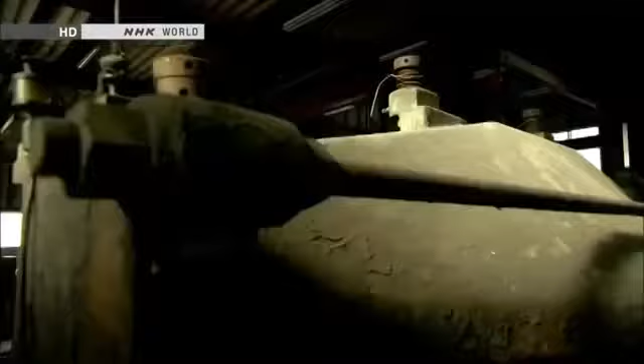The future is just around the corner. In a workshop near Mount Fuji, a curious being has appeared. It's 3.8 meters tall and weighs 4 tons. It is a giant humanoid robot named Kuratas.

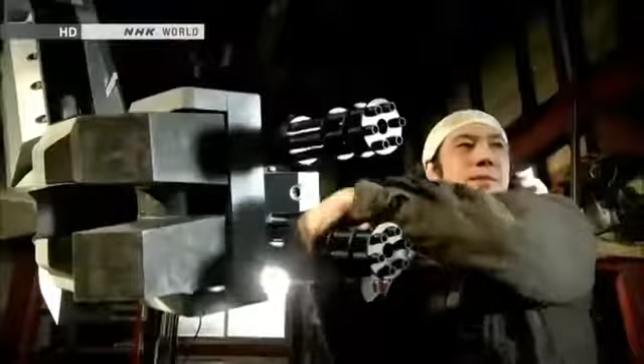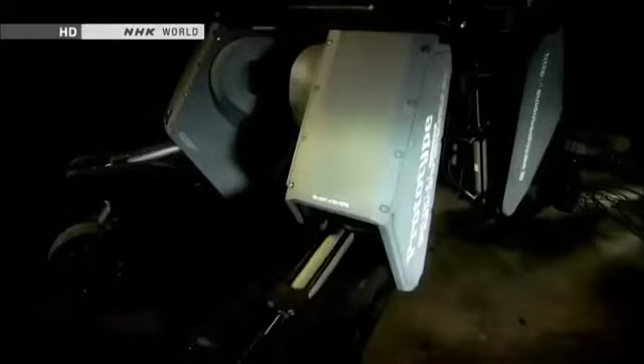Kuratas is a contemporary artist's creation. He holed up here for 2 years, building the robot with input from an expert. He calls Kuratas a work of art, but it's a sophisticated piece of machinery. A person seated inside can control the robot, move its limbs, and grab things. The artist says he was inspired by robots in science fiction tales and animation. That vision sustained him as he worked in solitude.

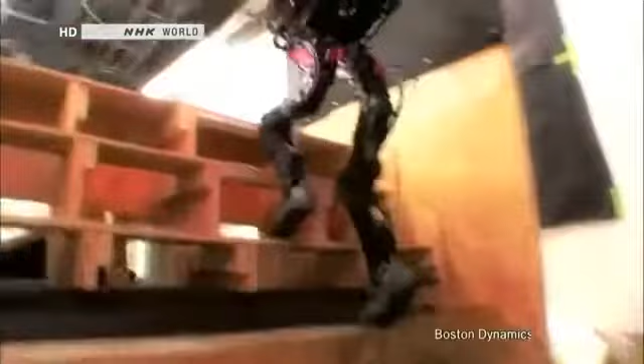Things that were once unthinkable are becoming real. How will robots evolve? Well, military applications could be one option. They'll probably become more and more like humans. They could surpass us in strength and ability. People long dreamed of creating these extreme machines. Now, humanoid robots are here. They think like we do, move like we do, and even sacrifice themselves for us.

We want our robot to change society, because robots must be useful. Electronics and computing, progress in vision systems, there's many pieces of it. We will see much more capability continue to grow. Since the Industrial Revolution, people have entrusted some jobs to machines.

But there may come a day when humanoid robots do much more complex jobs. Then, what will people do? You'll see more and more robots doing things in society, whether it's manufacturing or service applications or home healthcare applications. The key will be skillfully dividing labor between humans and humanoid robots.

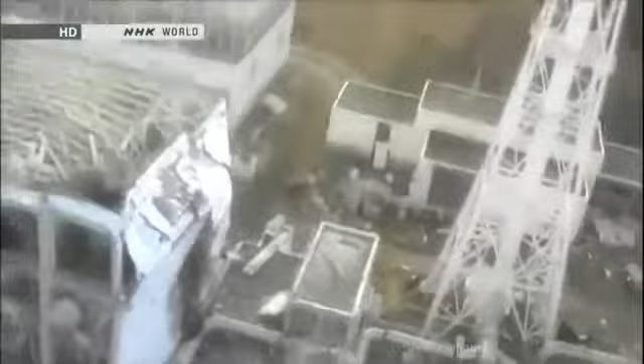The disaster that hit Japan in March 2011 accelerated efforts to develop robots with human traits. The Fukushima nuclear accident left people powerless. Robots can take over when things become dangerous. They can plow through rubble, climb ladders, even make repairs. People are turning to humanoid robots to handle all of these tasks.

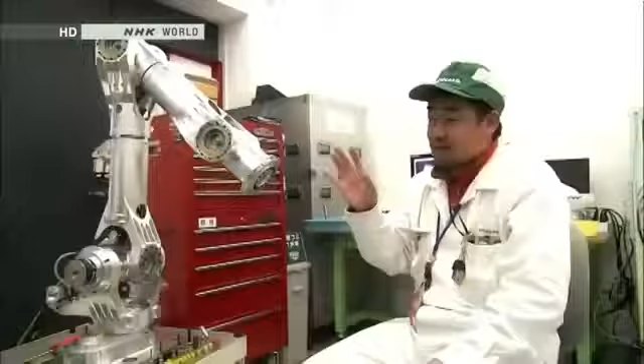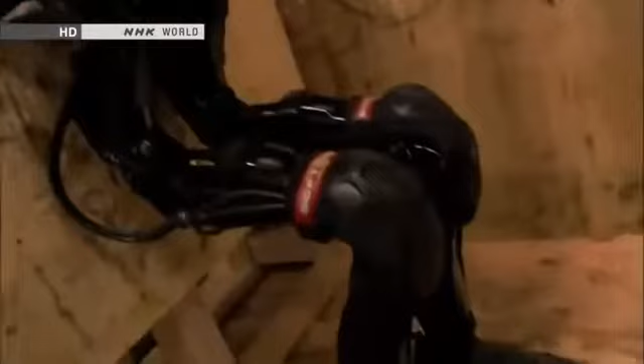This program explores the future that's fast approaching.

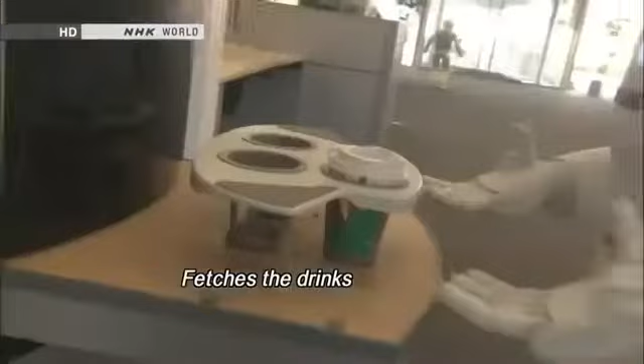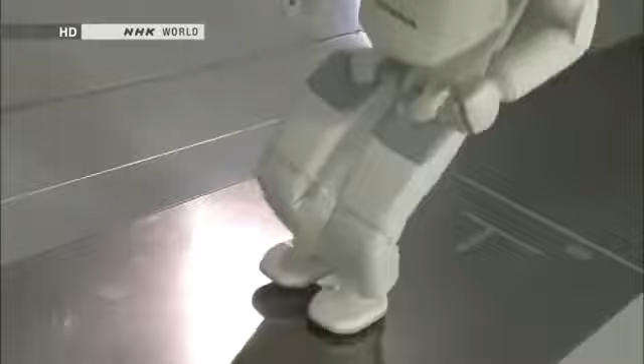Asimo was created by Honda's research and development subsidiary. We were allowed to film their top-secret robotics laboratory. Japan is a worldwide leader in the development of humanoid robots. Asimo is the country's crowning achievement. Engineers continue to make improvements.

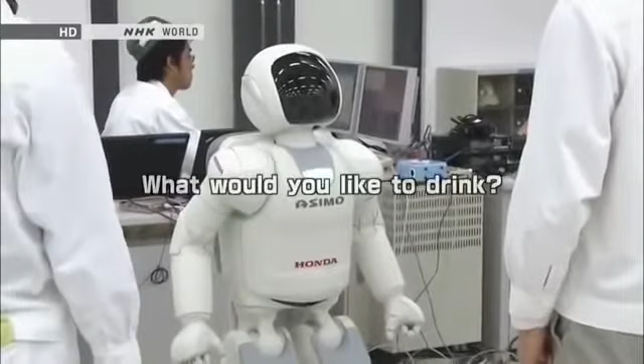Asimo's most innovative feature is its advanced intelligence. The robot can think and act on its own without human intervention. That's made possible by sensors that replicate our 5 senses. Asimo's head contains 8 microphones. It uses them to listen and engage in conversation.

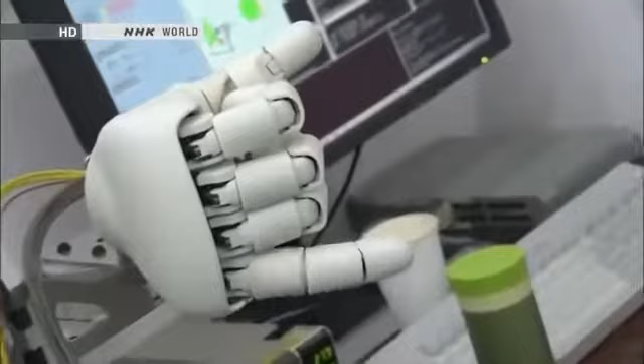Asimo's artificial intelligence analyzes a vast array of information. That's how it understands people's requests and takes appropriate actions. Asimo also has a sophisticated sense of touch. Its fingers can make subtle movements, like a person's. Sensors are embedded in the fingertips, too. They can gauge the hardness of an object, like human fingers do.

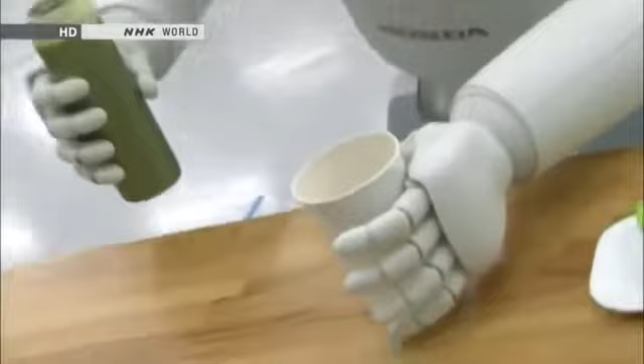Most robots use a fixed amount of strength to grab things. But Asimo exerts more power to open a tightly sealed water bottle and less when holding a paper cup. Its artificial intelligence uses information from the fingertip sensors to adjust the grip.

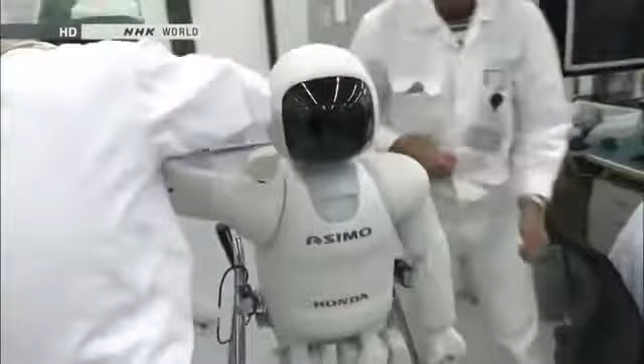The developer's ultimate goal is for Asimo to be a valuable partner that coexists with humans. The engineers who created Asimo all grew up watching animated shows about robots, such as Astro Boy, Doraemon, and Gundam. They dreamed of someday making their own.

Satoshi Shigemi is the development team's leader. He has been designing robots for the past 16 years. From the beginning, we wanted to design a robot that could help people. To realize that dream, we're constantly asking ourselves, what kind of robot would be able to change society, make people happy, and make life easier for people around the world?

Our idea is to create a robot that will change how people live. We're working through the technological issues, one by one, in order to reach that goal.

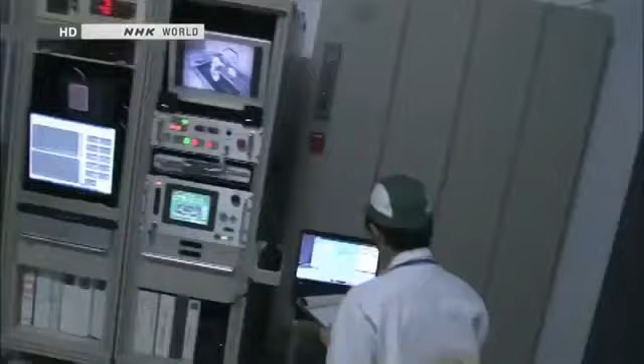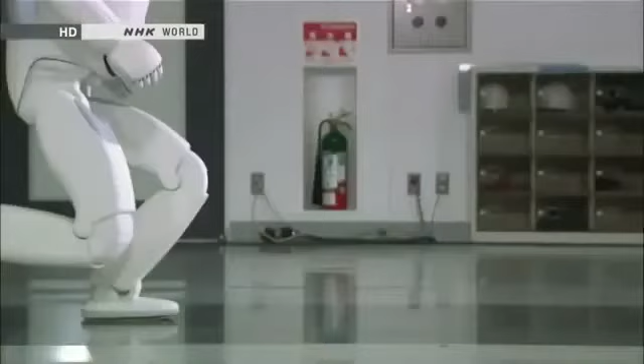Asimo's advanced physical capabilities are revolutionary. The robot can walk and run. It can reach speeds of up to 9 kilometers an hour. For robots, walking is much easier than running. When running, both feet momentarily leave the ground. Balancing in mid-air is no easy task.

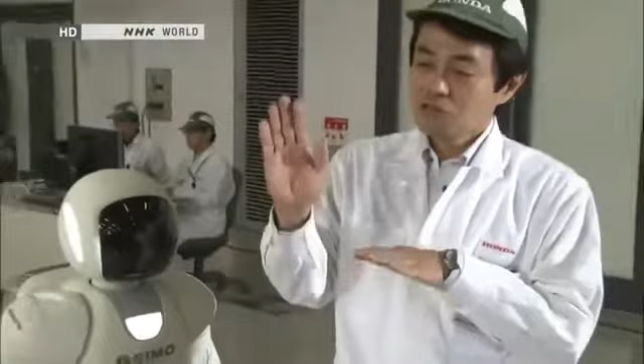Maintaining posture while jumping or floating in the air was a major technological breakthrough. Asimo leans its upper body slightly forward to maintain overall balance, then goes forward straight in the air. Sensors in Asimo's waist measure the robot's angle, and it leans slightly to compensate, forward or back, side to side. That's how it stays perfectly balanced in the air.

Asimo has been evolving ever since development began in 1986, much like a growing child. But something happened that made researchers realize Asimo's real-world limitations: the accident at Tokyo Electric Power Company's Fukushima Daiichi nuclear plant.

The damaged reactors released radioactive substances, making it difficult for humans to deal with the crisis. People needed something that could confront the dangers and bring the plant under control: robots. Japanese officials sent a request for robots developed by the U.S. military. The robots were sent to Fukushima in April 2011 and recorded images inside the damaged reactors.

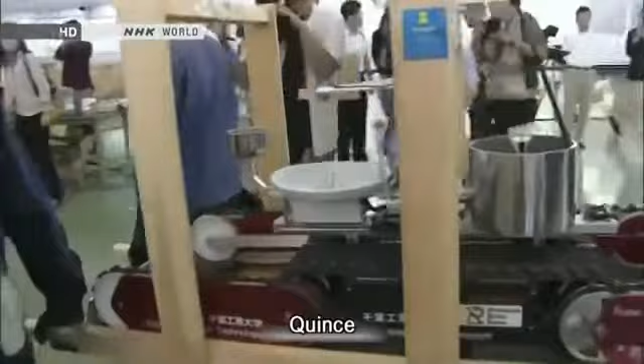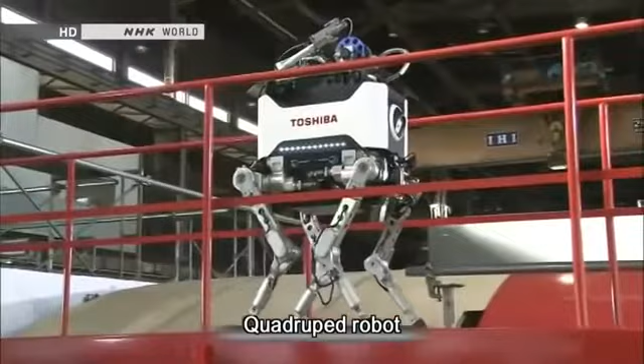Since then, a variety of Japanese robots have been enlisted as well. Robots have proven to be useful, but 2 years after the accident, they're only used for inspections. They're not able to do all the work of humans.

What about Asimo? Right after the disaster, people flooded Honda with phone calls and emails asking the company to send Asimo to the Fukushima plant. But Asimo wasn't up to the task. It could move nimbly over an office floor and other flat surfaces, but large vertical gaps and obstacles were a different story.

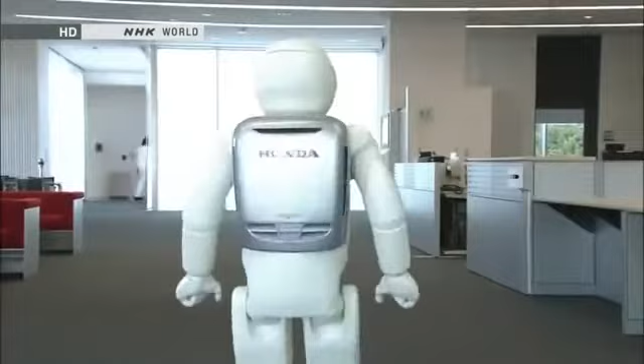We heard from many customers. We ourselves regretted that Asimo couldn't be of help. It was obvious that the Asimo we had built wasn't ready for real-life action. We realized right away that we needed to make something different, something new that could offer immediate assistance.

Honda wasted no time. Company officials offered to create a robot free of charge to assist TEPCO in the recovery. TEPCO accepted. Officials asked for a robot that could open or close valves inside the nuclear plant.

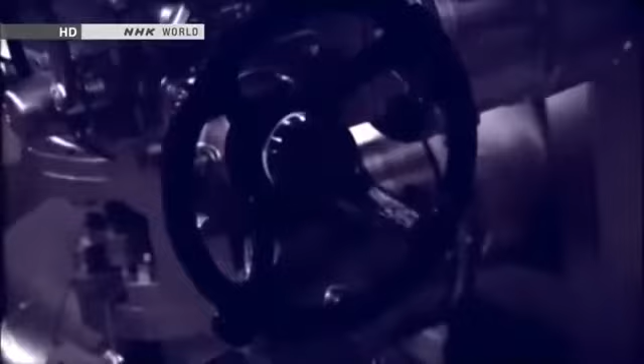We wanted to flush out radioactive materials that remained inside the pipes and bring down radiation levels in the facility. That was our first goal. Unless we opened or closed the valves, the area would remain highly radioactive, and that would prevent workers from entering the facility, and impact the entire decommissioning schedule.

How many valves are there? Each unit has from several thousand to tens of thousands of them. In July 2011, four months after the accident, Honda began designing a robot for use at the nuclear plant.

Members of the Asimo team were put in charge of the project. A humanoid robot would take too long to build, so engineers focused on making a robot specifically for operating valves. Asimo was crucial to their efforts—its ankles employ advanced balancing technology. Developers reasoned that using it would allow the new robot to work inside rubble-filled reactor buildings.

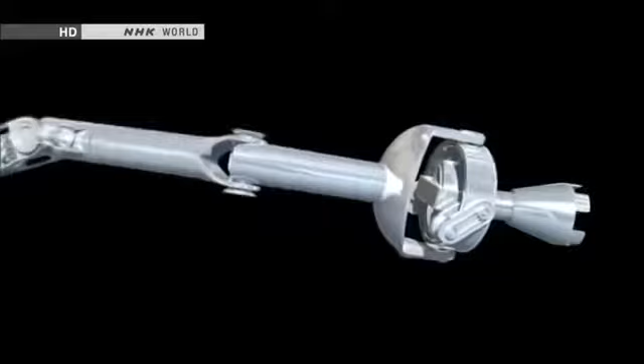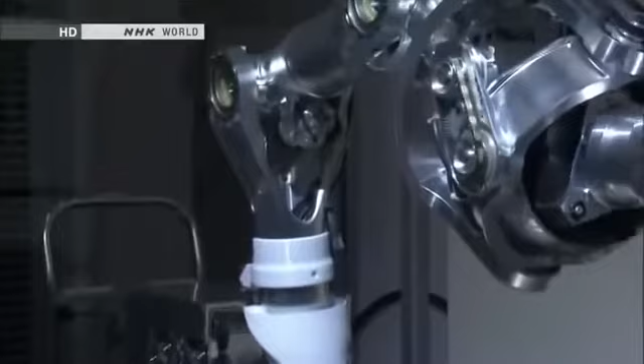The team worked exceptionally fast, completing a prototype in just four months. They turned Asimo's leg into an arm for operating the valves. Even when the base moves, the arm remains steady. So far, so good.

Officials from TEPCO evaluated the prototype at the National Institute of Advanced Industrial Science and Technology. The government-backed group for cutting-edge research contributed to the development effort. A TEPCO official couldn't take his eyes off the robot's movements.

We may be quite demanding. That's okay. We might be quite direct. The test is designed to replicate conditions inside the nuclear plant.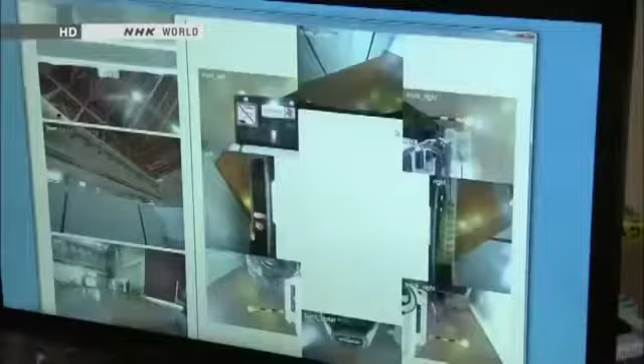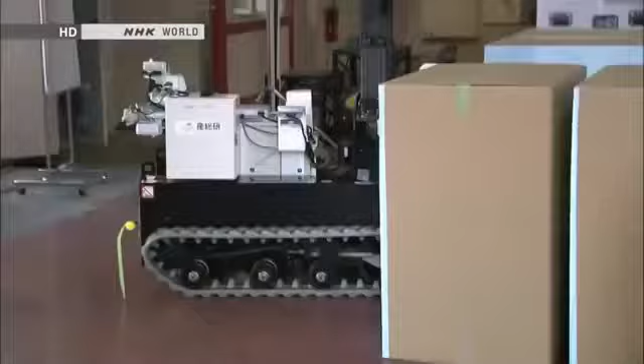The robotic arm is remote controlled. Testers send the arm toward one of the valves. There are a number of unknowns, including the condition of the valves—they may have rusted since the accident. A valve might break if the robot applies too much force, or it might not budge at all.

The robot uses just the right amount of force and turns the valve on the first try. It's passed the test. This robot can do more than inspections—it could help in the recovery effort.

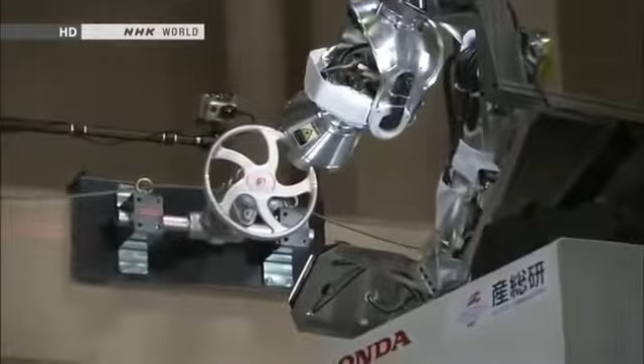From what we've seen, the robot seems near perfect. We want to use it as soon as the need arises. It's important that we quickly do what we can to make that possible.

The Fukushima accident also encouraged U.S. developers to design emergency response robots. Department of Defense officials have spearheaded the effort. Before, they had shown little interest in humanoid robots. Now, they view them as vital for disaster response. The architect of the new strategy is Gill Pratt of DARPA, who oversees funding for leading-edge research at the Department of Defense.

There are many aspects of disaster response in Fukushima that inspire people in robotics to work on new capabilities. If they were able to take action during those first 24 hours, then the first reactor maybe would not have blown up in an environment that is too dangerous for a person to do.

What's important to us is that the robot is compatible with human environments, compatible with human tools, and also compatible with human operators without special training. As a result of that, the easiest form that comes to mind is the human form.

Why the sudden interest in humanoid robots? Traveling over debris, prying open valves, using tools for repairs. Performing multiple tasks like these is impossible for specialized robots. Crises also require robots that can navigate doors and stairs. Humanoid robots are ideally suited for such situations.

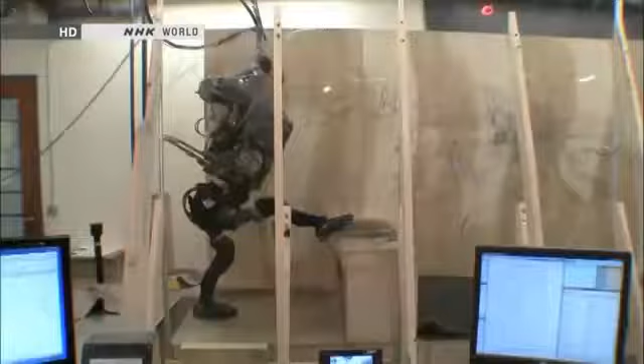Tests of this prototype were going smoothly. It can easily climb stairs and jump from a height of nearly 1 meter. It can negotiate obstacles using its arms and legs. It can already handle more demanding environments than ASIMO can.

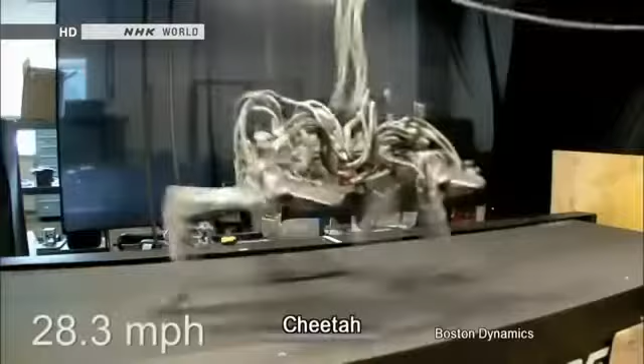Atlas is loaded with technologies originally designed for military robots. A quadruped robot called Cheetah can race through a battlefield at 45 kilometers an hour. LS-3 is for transport. It can carry heavy supplies for soldiers.

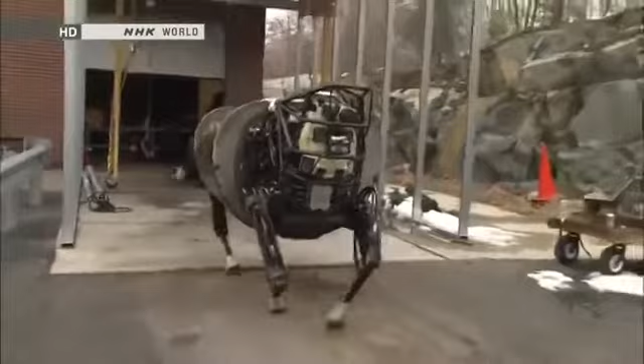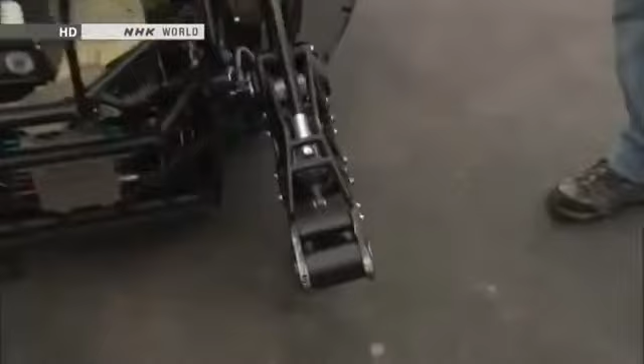The ferocious-looking robot gets its strength from a powerful hydraulic drive system. A hydraulic device can be small, yet quite strong. The black cables convey hydraulic power to the legs. That generates the brute force required for harsh conditions on the battlefield.

A web of hydraulic cables covers Atlas's body. They form a muscular suit of armor for clearing debris.

Another important technology comes from military robot engineering. This machine's joints have a wide range of motion. They allow for flexibility that humans can't achieve. Atlas's joints are capable of moving in 28 different ways. Atlas can crawl through narrow spaces and withstand sudden shocks.

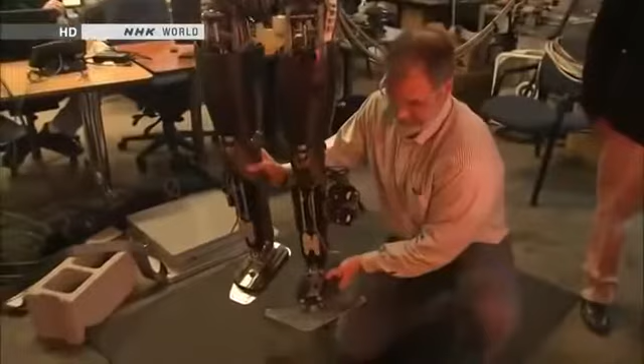But then we have the knee. This has 3 in the hip, just like us. This way, and then this way. I am very impressed with the number of degrees of freedom.

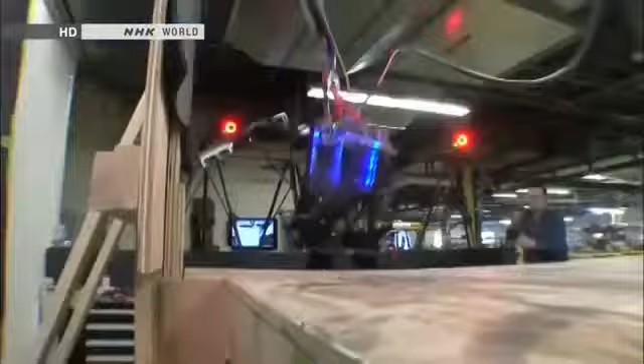It will be able to do these human-compatible tasks without a lot of the limitations that other robots have. Engineers will combine Atlas's rugged body with sophisticated artificial intelligence that's almost near completion. They aim to complete the robot by December of next year.

One reason you see humanoid robots is because there are people working who are really interested in robots as an entertainment thing or as a performance thing. I think that's different. We're much more interested in basic capabilities for emergency response, rescue. So I don't think ASIMO has been designed to do those things yet.

U.S. engineers stepped up their efforts to develop humanoid robots after the nuclear accident in Japan. Japanese researchers are embracing the same mission. In November 2012, robot engineers from around the world gathered in Osaka for an international conference on humanoids.

Gil Pratt from DARPA was one of the participants. He came to invite engineers to join a project sponsored by the U.S. Defense Department. Okay, March 11th.

After 24 hours, if only a robot had been there to go and open that valve, the entire disaster could have been averted. But we didn't have one, and furthermore we didn't have anyone that could do the job. So shortly afterwards, we actually started planning the DARPA Robotics Challenge.

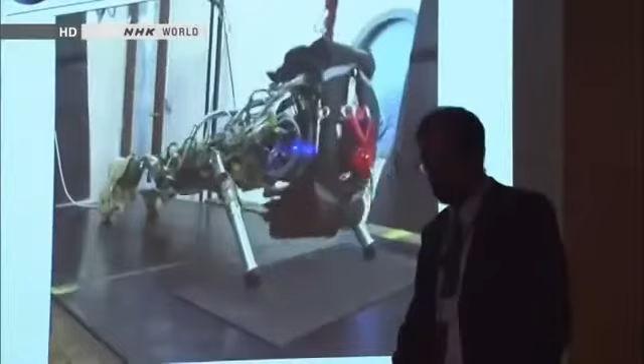They have 2 degrees of freedom, not 1. The Robotics Challenge is a competition to develop emergency response robots for major disasters, like Japan's.

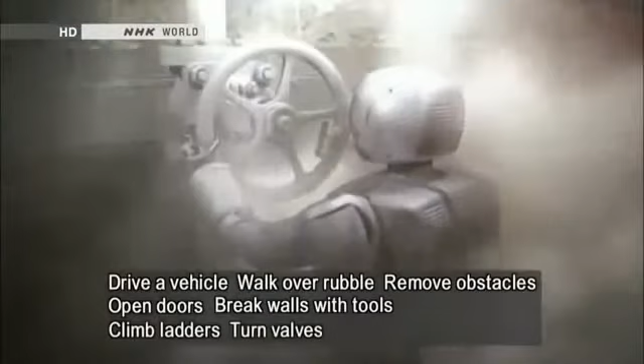The challenge consists of 8 tasks: driving a vehicle to approach a disaster site, walking over rubble, removing obstacles, opening doors, using tools to break down walls, climbing ladders, turning valves, and making repairs.

A single robot must complete all 8 tasks. The development period is 2 years. DARPA will provide contestants with funding of up to $4 million.

DARPA has received over 100 proposals from research groups worldwide. They include renowned organizations like NASA and MIT. Japan is at the forefront of humanoid robotics engineering, yet its researchers hesitated to throw their hats into the ring.

So actually, to me, it's difficult not to see that some of the results of DRC are going to be used to advance, as you say, advanced military technology. The DRC is about developing robots that I believe wholeheartedly are completely impractical for military purposes, for offensive military purposes.

Will the technology that we come up with find its way into military systems? Probably yes. But I guarantee you that if you work on a robot for healthcare, there's a chance that that technology will also find its way into military systems. The members of one Japanese research institution wanted to take part in the competition.

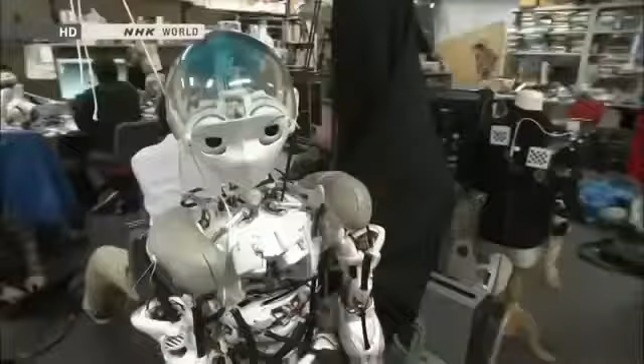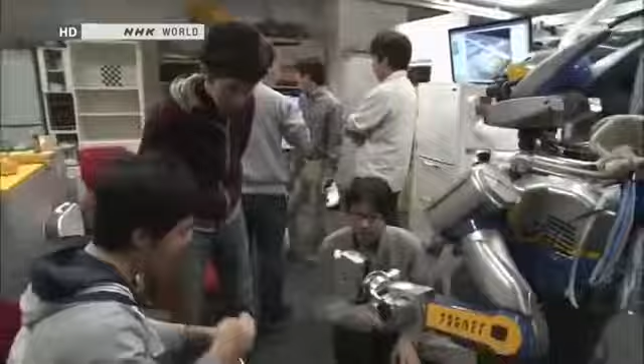They worked at the University of Tokyo's robotics lab. Researchers there, along with those at Honda, are global leaders in robotics engineering. But they faced a major obstacle to competing: the university bans military-funded research.

Three researchers made a decision. They told the university they were leaving. Then they decided to set up a venture company and enter the DARPA Robotics Challenge.

They couldn't shake the feeling that they should leave their quiet university lab and help resolve the nuclear crisis.

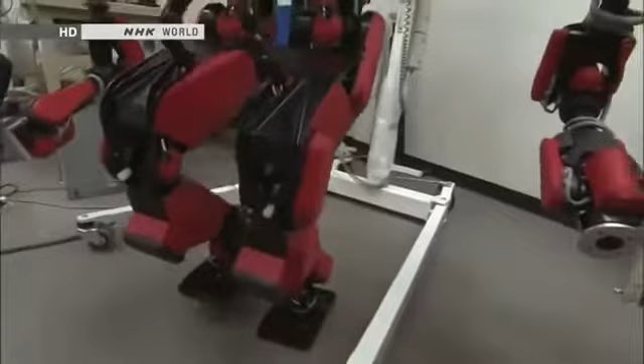Six months after launching their venture, the team had just completed a prototype with help from university graduates. Its long arms can exert 10 times more force than those of conventional humanoid robots.

It's too tight to turn with one hand. It can easily turn a valve that's too tight for a person to turn.

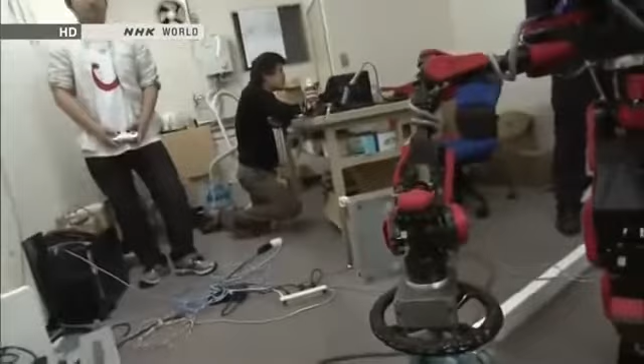The strong force comes from a large electric current that pushes the motors to their maximum limits.

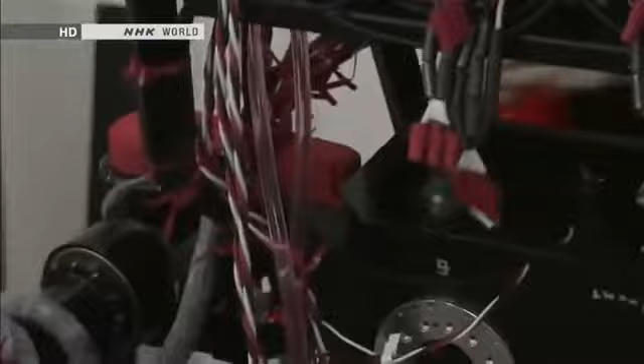A reddish fluid circulates through the robot's body. The fluid serves as a coolant that keeps the motors from overheating. The cooling system should enable the robot to perform hours of grueling work at disaster sites.

The time has now come for the developers to apply their years of research to the real world. A nuclear crisis has happened here in Japan. Radiation is escaping. Researchers in every field must wonder at least once if the technology they've been working on could help resolve the crisis. By joining forces, we can make a truly useful contribution. It's with this in mind that we decided to enter the competition.

One country is quickly catching up with Japan in humanoid robotics: South Korea.

KAIST is a government-funded lab for the advancement of science and technology. Researchers there were among the first to express interest in DARPA's robotics challenge.

This humanoid robot is called Hubo. It's modeled on Asimo, which Honda spent 14 years developing. Hubo was built in just 5 years.

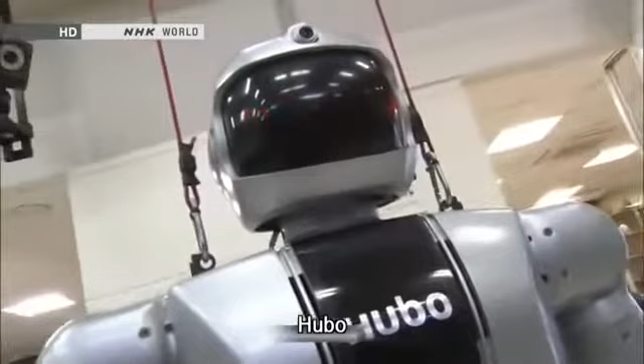Hubo deftly manipulates its hands, and it's also good at dancing. Its moves look just like Asimo's.

Hubo has been undergoing a major upgrade ahead of the competition. It can now bend backward at the waist while walking to handle all kinds of environments. It can quickly pick up tools. The tests were going well.

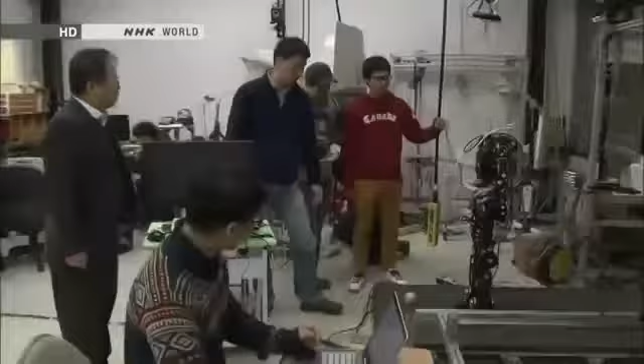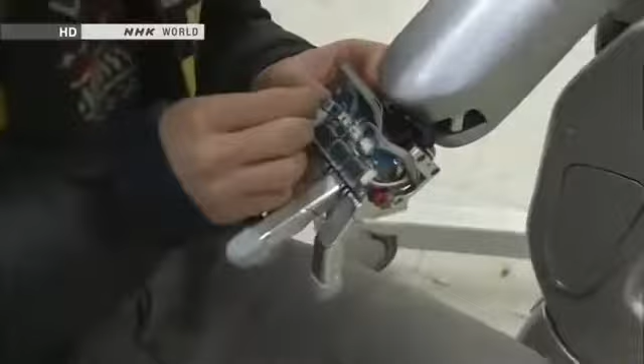People have always compared Hubo to Asimo. Engineers now had a strategy to get ahead of the Japanese developers. They decided to publish certain details about Hubo's design and pursue joint development with researchers at other institutions.

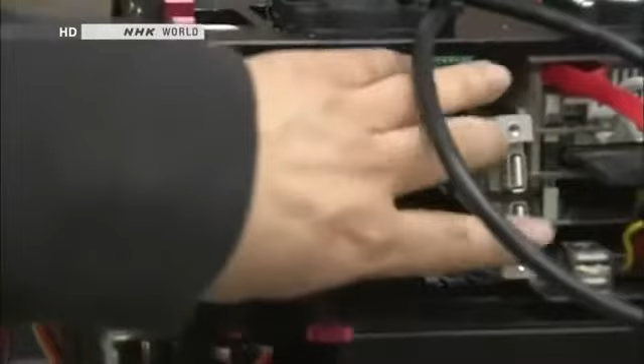One could say that this space inside Hubo's chest captures the heart of their thinking. It's empty now, but this is where artificial intelligence will be installed. It's removable. Hubo does not yet possess artificial intelligence.

Its motions are as sophisticated as Asimo's, but Hubo's movements are all pre-programmed. U.S. universities that lead research into artificial intelligence will develop a brain for Hubo. The stage has been set for a joint U.S.-South Korean team to compete in the DARPA Robotics Challenge.

Sharing is the key to making technological advancements. That's true in South Korea and in other places too. Research shouldn't be confined to one place. People developing humanoid robots elsewhere are too close-minded.

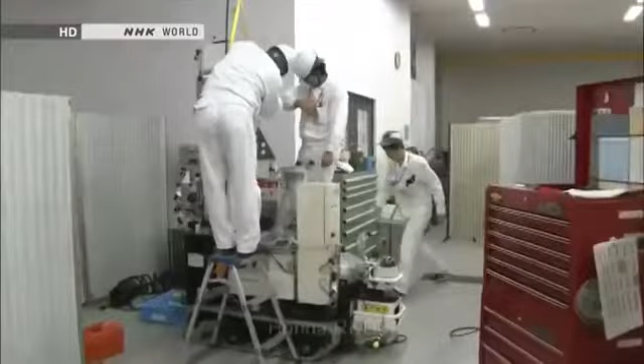Researchers at Honda were also invited to enter DARPA's competition. But they declined. Their energies were focused on designing a robot to tackle Japan's nuclear crisis.

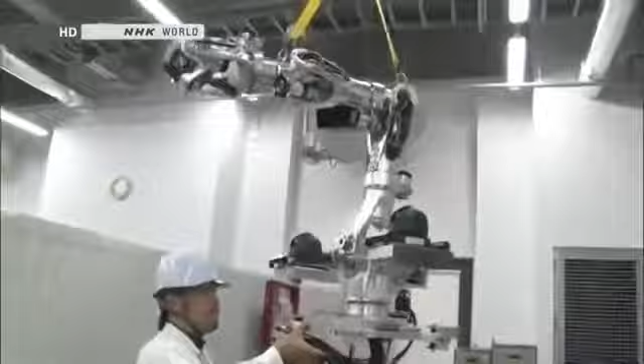Nearly a year has passed since Honda's robotic arm passed evaluation tests, but the device has yet to be deployed to the nuclear disaster site. That's because officials at TEPCO requested a change in specifications. Engineers have replaced the valve-turning hand at the end of the arm with a camera.

TEPCO had changed its plan. Officials decided to put priority on assessing conditions inside the plant's facilities. They said it was too early to have robots work on valves.

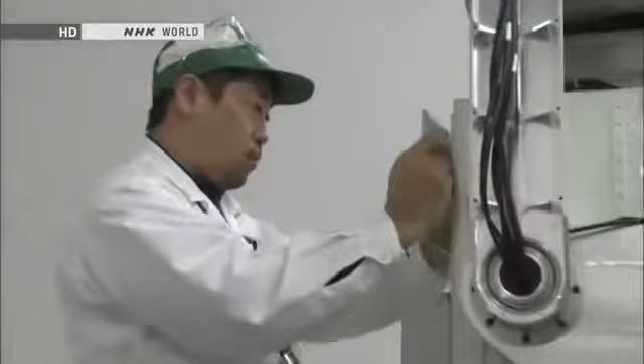There wasn't even a recovery plan in place when we were working out the valve manipulation tasks. Confusion also prevailed at the site. We were expecting valve work to begin 2 to 3 years after the disaster, but the timing has ended up being later than what we'd assumed, 1 month into the crisis.

The robotic arm will soon be sent to the accident site. It will provide the first images filmed from high up.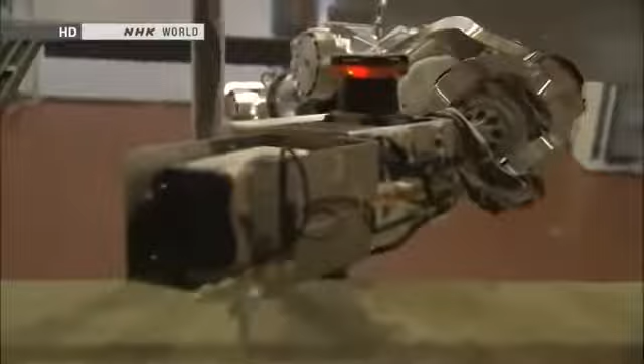The robotic arm was not the end of Honda's efforts. Its engineers had another secret mission.

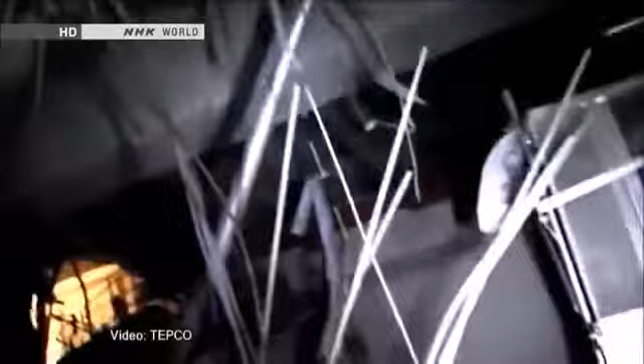They would develop a new humanoid robot, an updated version of Asimo for use in disasters. The site where the Fukushima disaster took place is dark and off-limits to humans. Only a humanoid robot with both intelligence and motor skills could climb over the debris, get to the accident site, and perform the work of people. In other words, a robot like Asimo.

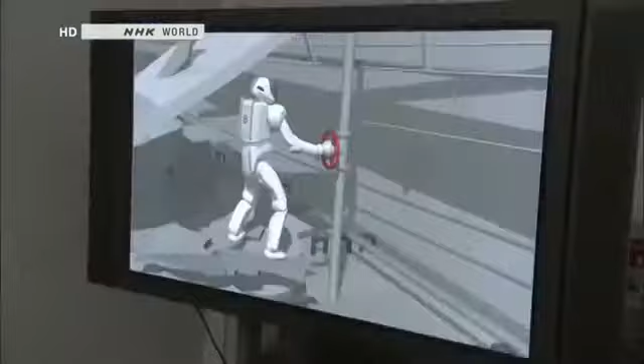Let's use our skills to make a humanoid robot that can tackle disasters. Asimo's engineers were united by this idea. The robot they envisioned would not only walk, but also use its arms to crawl. It would use every means possible to reach its destination. A dramatic update would be necessary.

A disaster reduction robot would be useless if it couldn't get to the site. It's important to get to the scene no matter what. Disasters create all kinds of debris that crumbles easily or breaks when stepped on. It's because it's dangerous that robots replace humans. That's what makes them valuable. A robot that couldn't get to the scene would be totally useless.

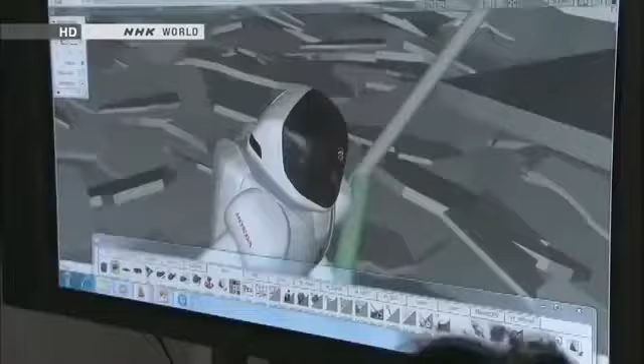Honda's engineers began developing robots in 1986 with the goal of making people happy. 27 years of research is now being put to the test. As we saw in the Fukushima Daiichi crisis, the bottom line is that robots can stand in for humans in places we can't go to or that are too dangerous. I am committed to delivering what's needed, when needed, in the shortest amount of time.

The accident in Fukushima spurred the development of humanoid robots around the world. The disaster also prompted people to question the roles of humans.

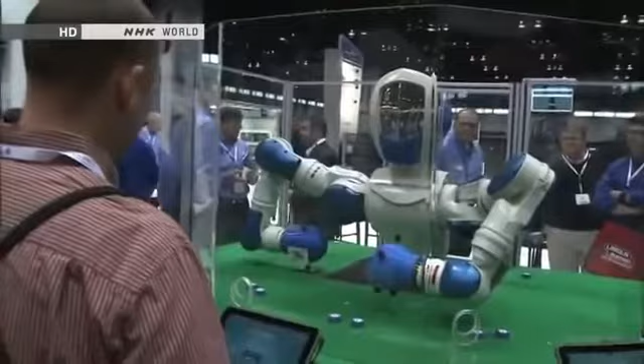One of the largest trade fairs featuring industrial robots took place in January. Global manufacturers displayed their latest models. Companies are developing more and more two-armed humanoids for industrial use. One new product at the event caught a lot of people's attention.

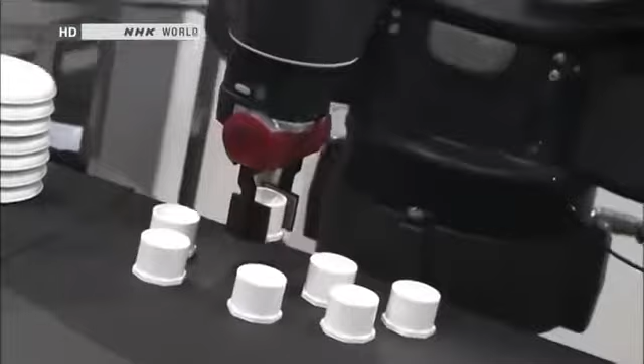Baxter was created by the inventor of a best-selling cleaning robot. It's equipped with sophisticated artificial intelligence. Baxter is designed to work side by side with people in factories and other settings. The robot's most unusual feature is its ability to master a task in a matter of 5 minutes. All that's required is step-by-step manual instruction; no complicated programming is needed.

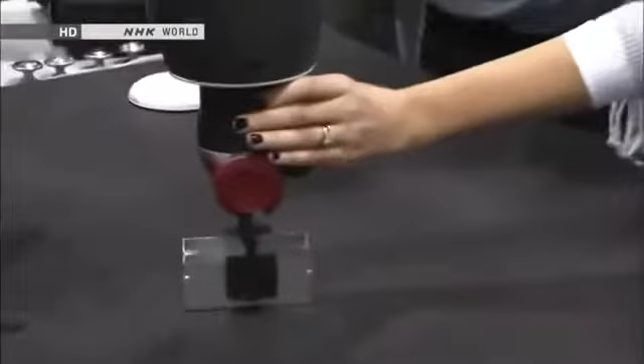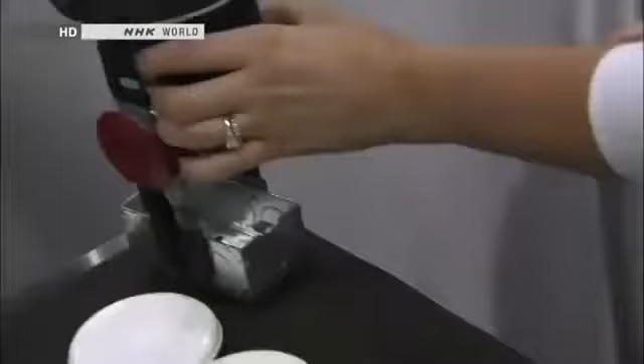The expression on the face on the LCD screen shows whether or not the robot has understood the task.

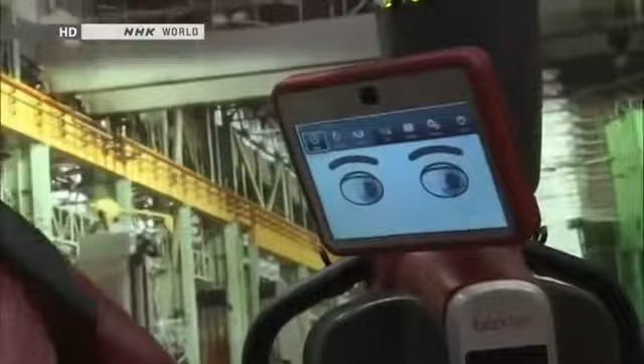Baxter costs $22,000, a bargain for a humanoid robot. The maker says buyers can recoup their investment in several months and slash labor costs.

I'm very impressed with it. I work for a small manufacturing company, and we have some older employees who are looking to retire. There's some tasks that Baxter could do for us very effectively, plus it would be cheaper than employing a person. It's not going to get tired, it's not going to need to stop. It'll keep running while everybody else is taking their lunch.

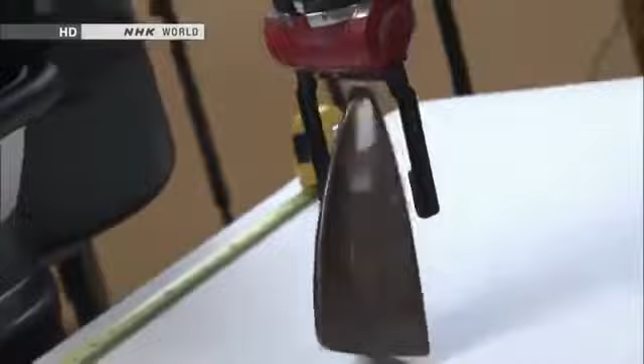The Boston-based manufacturer has a flood of back orders. Officials say someday Baxter will work at places like coffee shops, taking orders and grilling burgers. Eventually, they expect to have 500,000 U.S. customers.

Today we're focused on manufacturing, and there's a very big opportunity in manufacturing. But there are lots of other places that a robot like Baxter could go. We had the Industrial Revolution at the turn of the last century. We've just gone through the computer revolution, effectively at the turn of the most recent century. We are now into the robot revolution.

Will people and robots someday compete for jobs?

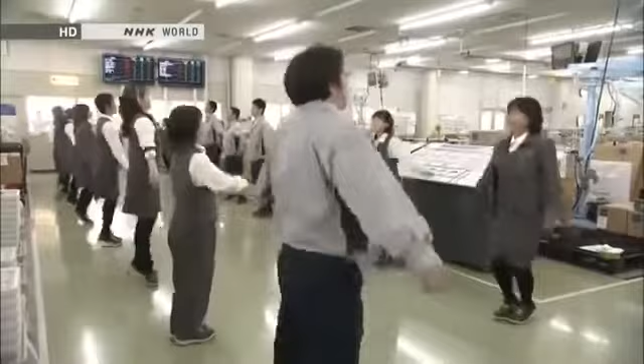At 8:30 one morning, a group of new employees takes part in daily morning exercises. They are 13 humanoid workers called Next Stage. This company began using the robots in earnest last year.

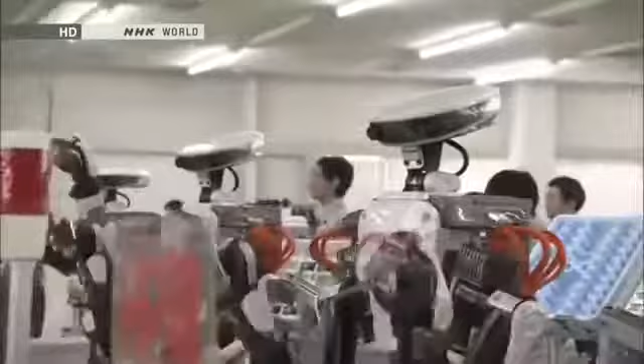They have 2 eyes and are just like humans. They're cute!

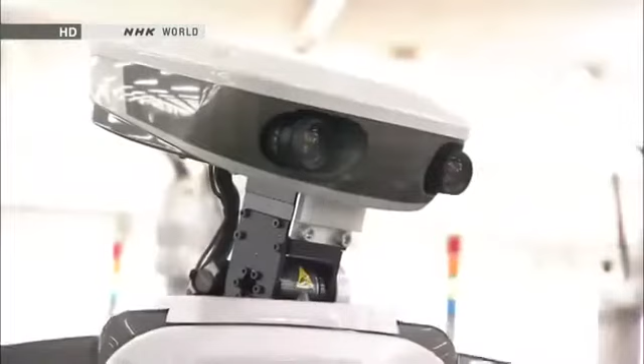This factory manufactures money sorting machines for cash registers. The humanoids work on a production line that was previously manned entirely by humans. The robot visually confirms the parts set in place by a human worker, then it begins its task.